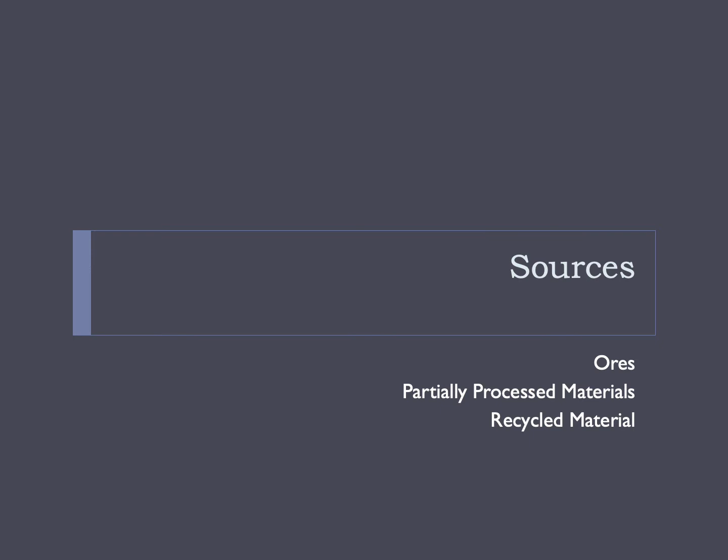Okay, so now we're gonna talk about sources. The sources can be ores, partially processed materials, and also recycled materials. In this video, I'm gonna explain about what is ore. Ores is a mixture of materials, one or more, which can be economically exploited to become a source for supply of particular materials.

So we can see in this table, ores can be a sulfide, for example, a nickel sulfide, PbS, a zinc sulfide or sphalerite. Can be oxide or hydroxide, for example, iron ore or titanium dioxide ore or alumina or bauxite. It's also in the form of oxide and hydroxide.

It can be halide or salt, sodium chloride, potassium chloride, or fluorspar, CaF2 is the halides, and carbonate, magnesium carbonate or calcium carbonate, dolomite is an example of carbonate. A sulfate, chromate, molybdate, tungstate, phosphate, silicate, and all of them are the types of the ore. So the main ore usually is a compound.

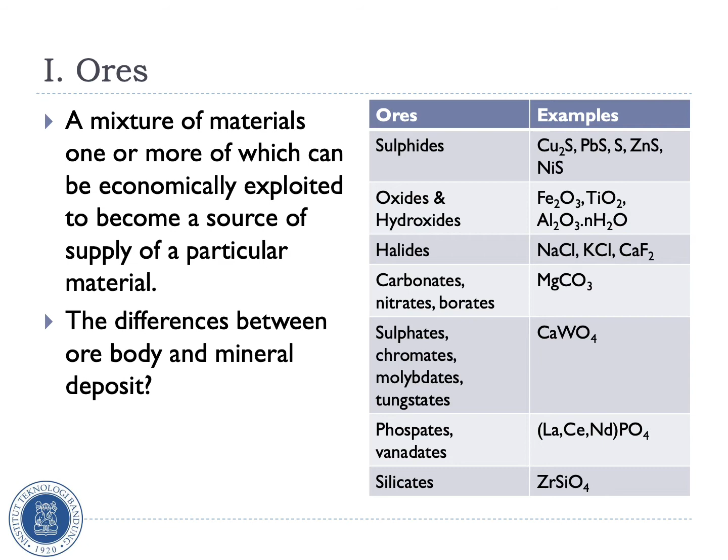Now, what is the difference of ore body and mineral deposit? An ore body is usually economically exploited, while the mineral deposit hasn't been economically feasible to be exploited.

Okay, so this is a summary of major sources of metals. Magnesium, the abundance is about 1.3%. You can see it in seawater or dolomite. The commercial product can be magnesium or magnesium oxide for chemical industries or for alloys and metallothermic operation.

The second one is aluminum. It is quite abundant in the earth, about 8%. The principal source is bauxite. It is used a lot to make Fe alloy or alumina or aluminum sulfate, okay, or for steel additive as an alloy or chemical equipment.

And nickel is very scarce actually in the earth, as pentlandite or laterite, about 0.016%. The commercial product is nickel. It is a very good ingredient for stainless steel or alloys. Copper in chalcopyrite or bornite; the commercial product is copper or copper oxide. The copper itself is used for electrical and thermal conductors.

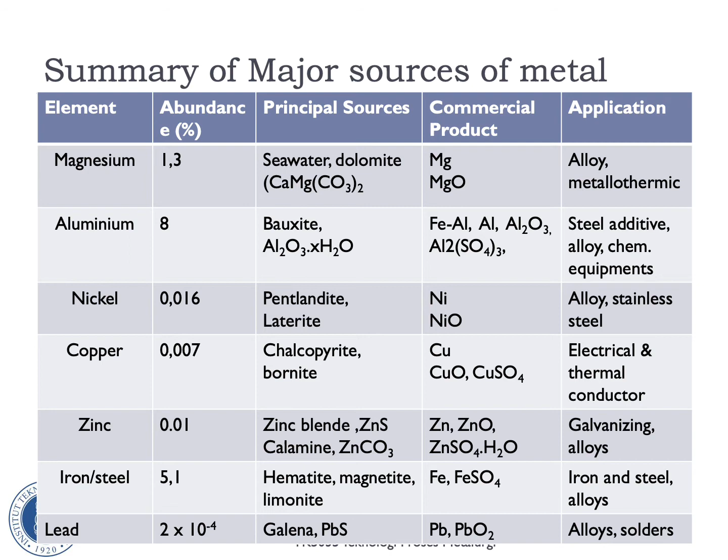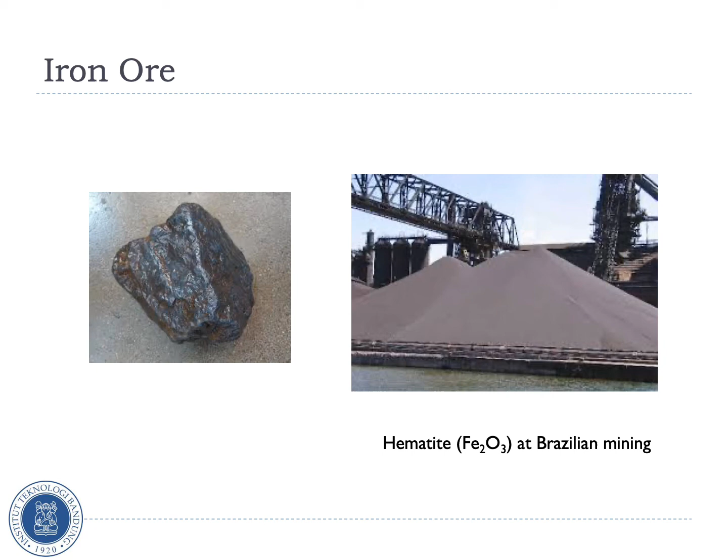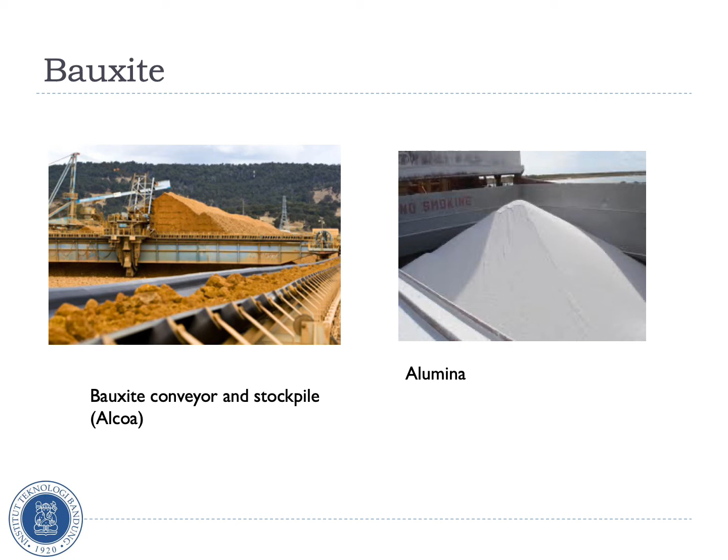So bauxite is processed using the Bayer process, and the refined product is called alumina. Alumina is Al2O3. And alumina is the principal raw material to make aluminum through the electrolysis process. In a later module, we will learn why we need to process alumina in an electrolysis way, not in a pyrometallurgical way.

And then another one is gold. We can see gold dispersed in other rock materials, or sometimes as a gold nugget. This is my picture when I was in Melbourne, Australia, in Ballarat. It used to be a gold mine city, and this was the replica of the gold nugget.

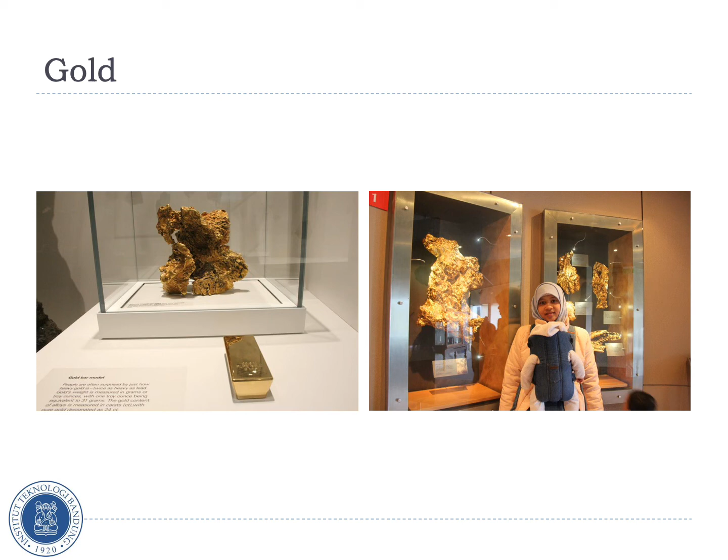Right. So, what are the macro characteristics of the ores? We need to know the characteristics so we know what to expect and how to process it. The size and the depth of the ore below the surface, the orientation relative to the surface, the integrity, the presence of geological faults, and geographical location as well. These are some of the major characteristics we need to know. Usually the geological engineers need to know if it is feasible to mine or not.

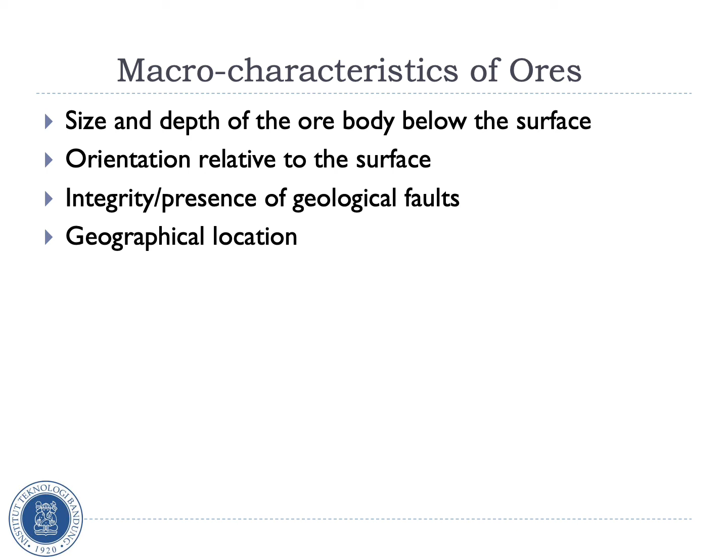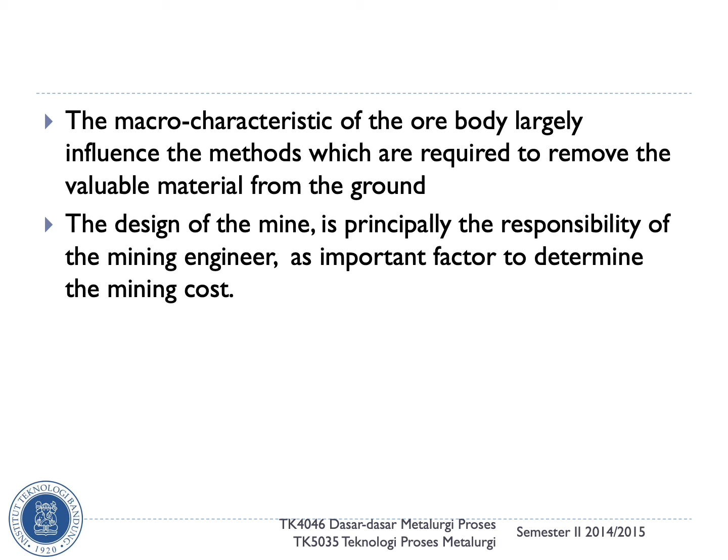The macro characteristics of the ores largely influence the method required to remove the valuable material from the ground. The design of the mine is principally the responsibility of mining engineers, an important factor to determine the mining cost. Apart from macro characteristics of ores, there are micro characteristics that are also very important.

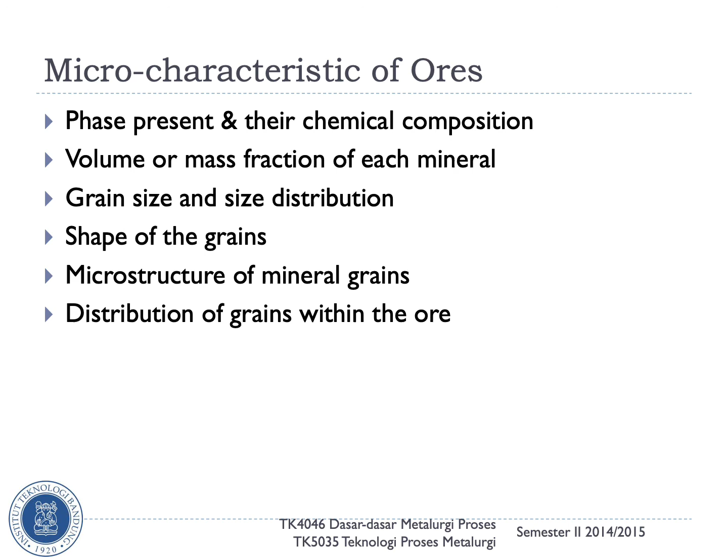For example, the phases present and their chemical composition, the volume and mass fraction of each mineral, grain size, size distribution, shape of the grain, microstructure of mineral grains, and distribution of grains within the ore. Micro characteristics influence the method which can be used for physical and chemical processing of the ore. The grain size of mineral phases can have a significant bearing on the choice of processes which may be used.

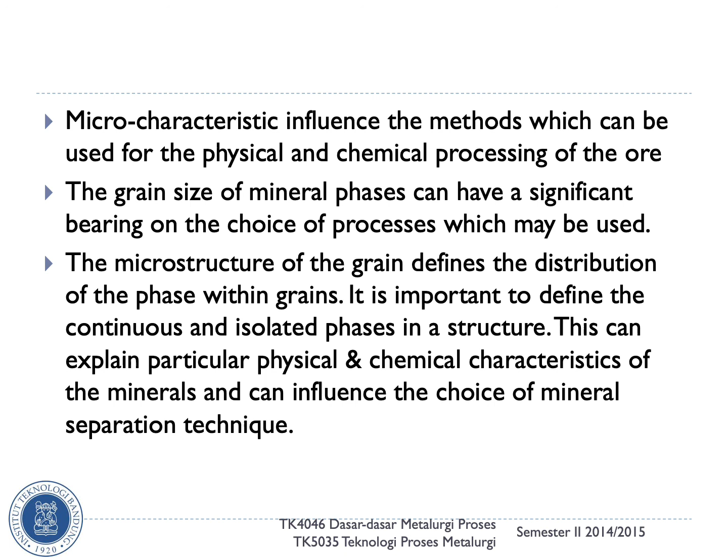The microstructure of the grain defines the distribution of the phases within grains, and it is important to define the continuous and isolated phases in the structure. It can explain the physical and chemical characteristics of the minerals and can influence the choice of mineral separation technique. So all these micro characteristics of ore will influence the choice of separation technique, physical process, or chemical route, hydrometallurgy, pyrometallurgy, or electrometallurgy that we need to select and design, based on feasibility and economics.